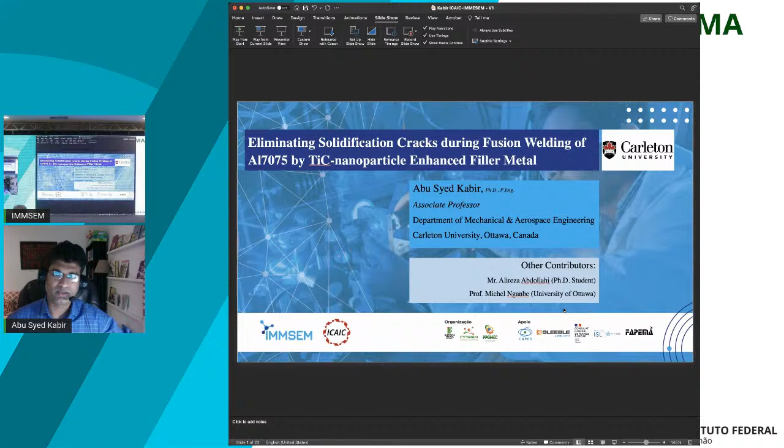And the topic for my presentation is eliminating solidification cracks during fusion welding of Aluminium 7075 alloy with titanium carbide nanoparticle enhanced filler metal.

Speaking of aluminum, it's about 8% of the Earth's crust is aluminum, making it the most abundant metal on the planet. However, it's always found combined with various other alloying elements, never by itself in pure state. Once we can get it in pure state, we can alloy it with different kinds of metals like zinc, copper, magnesium, manganese, and silicon, creating different alloys with different microstructures and properties.

I can continue, right?

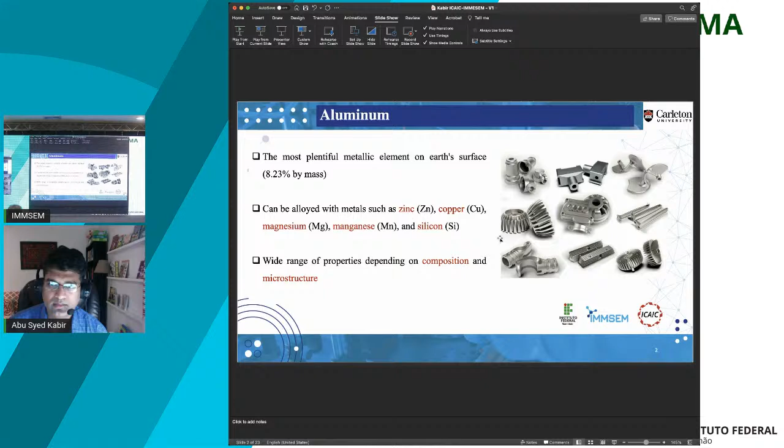Speaking a little about the history of aluminum alloys, the extraction of aluminum was so difficult during the early 19th century that it was more precious than gold. The story goes that Emperor Napoleon III reserved a prized set of aluminum cutlery for a special guest at banquets, and the less favored guests used gold knives and forks.

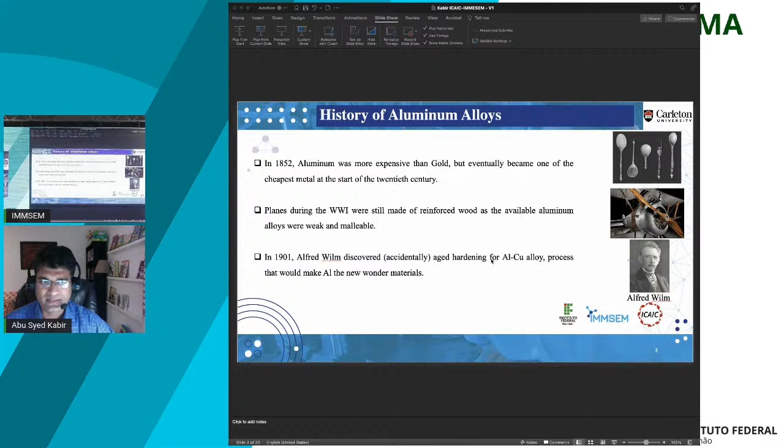The very first Wright brothers aircraft was mostly made of wood and bamboo frame, covered with canvas. The aircraft needed to be very light due to limited engine capacity, and there was simply no metal light enough at that time. At the same time, aluminum was available but prohibitively expensive, so most aircrafts before or during the World War I era were made of wood.

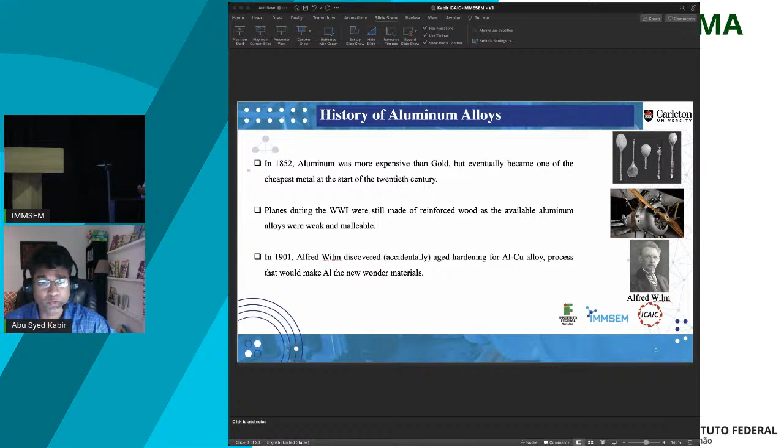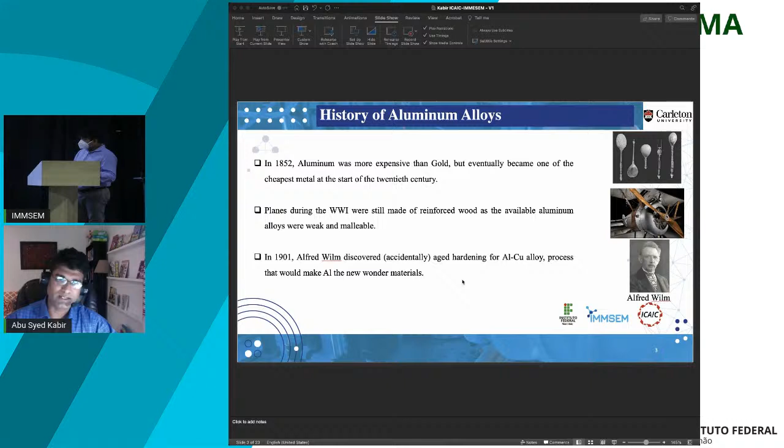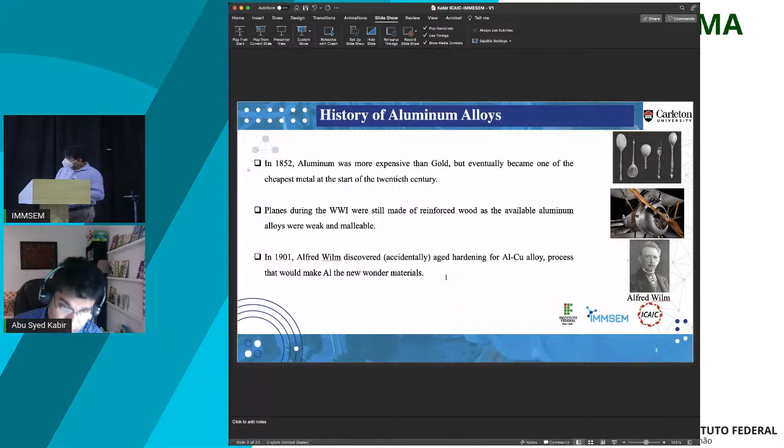Actually, during the time of World War I and World War II is when the use of aluminum became really versatile, especially in the aerospace industry. Another significant history in the aluminum industry is in the early 1900s when Alfred Wilm accidentally discovered the age hardening of aluminum 4% copper alloy. He actually created a new wonder material of the world by accident.

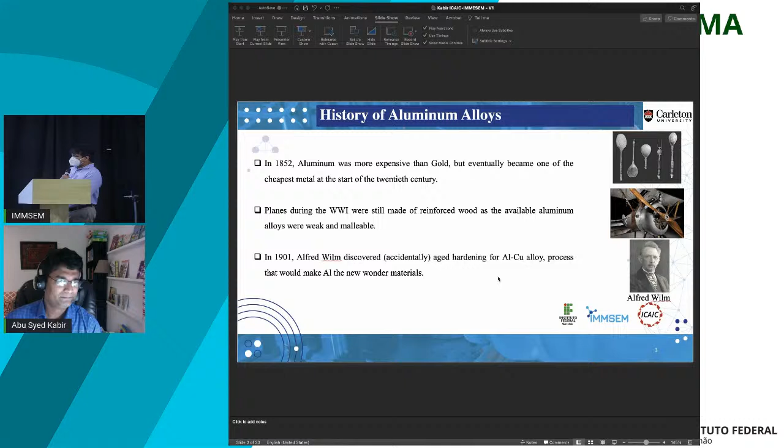Okay, you can go ahead with your presentation. At the end of the presentation, I'll be here for the question answer. Okay, you can go through in English. Okay, go ahead, that's very good.

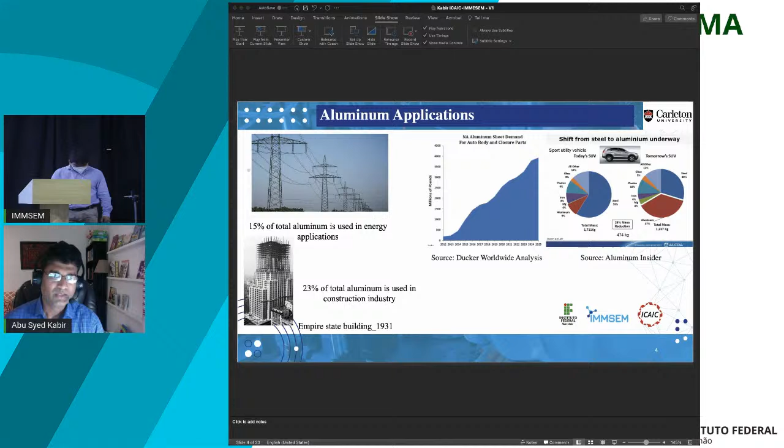Even though copper is a better conductor, all main overhead power lines use aluminum as the conducting material. To carry the same amount of current as a copper wire, the aluminum wire needs to be 1.5 times thicker, but is still 2 times lighter than copper. This decrease in load allows the spans between pylons to increase dramatically, saving a lot of money on construction of these overhead lines.

Speaking of construction, it is one of the highest users of aluminum alloys. Almost 23% of aluminum goes into the construction industry. The example here is the Empire State Building, built somewhere in 1930 and 1931, one of the earliest skyscrapers to use aluminum extensively because of its corrosion resistance and lightness. It was the perfect material for exterior framing and roofing.

Speaking about the automotive industry, automobile manufacturers are adopting aluminum alloys very fast. You can see the curve going straight up, and aluminum is replacing steel.

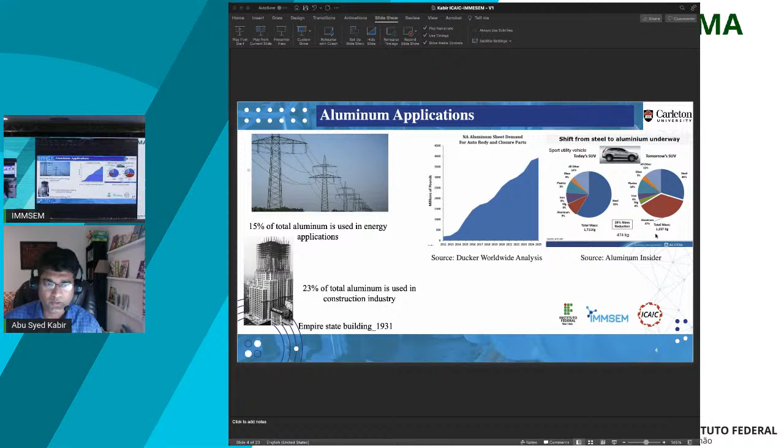There's an example published in Aluminum Insider that these days an SUV weighs about 1.7 tons, but within the next 3 or 4 years an SUV will weigh about 1.2 tons. That's almost 500 kilograms of weight savings. How are they going to do that? They're going to increase the amount of aluminum significantly.

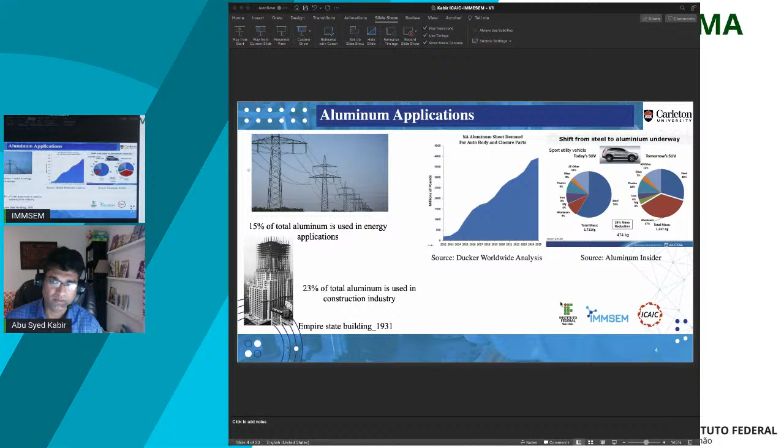Today's SUV has almost 60% steel, but they're going to use about 30% steel and replace it with 37% aluminum. There will be other materials too, like 4% magnesium, but aluminum is the one that will replace most of the weight, which is very important for the fuel efficiency of the car.

Now I have to talk about the history of aluminum in aerospace applications because that's my primary interest, as I'm from mechanical and aerospace engineering. A little history about aluminum in aerospace: the Wright brothers' aircraft, although made of wood and reinforced steel, had an engine made of aluminum alloy. The Wright brothers designed and manufactured this engine themselves.

At that time, in the early 1900s, the only engines available were automobile engines, but those were made of steel and were extremely heavy, not providing enough power to achieve takeoff. So the Wright brothers manufactured their engine from an aluminum-copper alloy. The story says they didn't want people to know the engine was made of aluminum alloy, so they coated the crankcase black so nobody knew what it was made of.

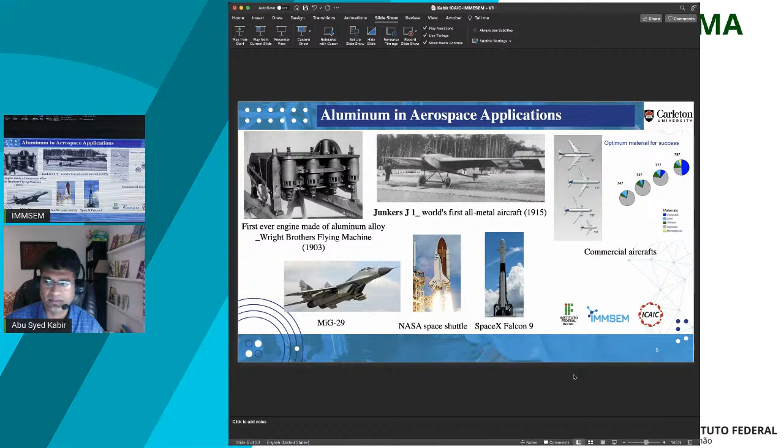Now talking about aluminum alloys, as I mentioned, different kinds of elements can be added with aluminum to create a wide range of chemical and mechanical properties. Based on that alloying addition, aluminum can be classified into 7 different classes.

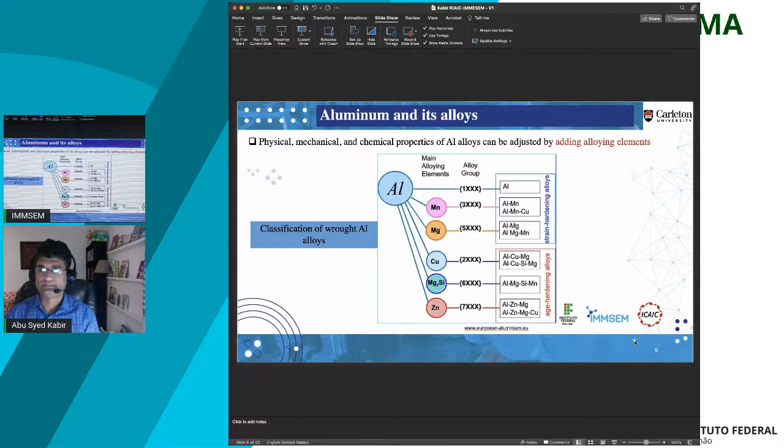We will target the 7000 series particularly because it is the strongest aluminum thus far it can create. So we will study the fusion welding of 7000 series alloy. A pesquisa está focada principalmente nessa classificação do alumínio com zinco, classificação 7000, que tem altíssima resistência. And the most popular 7000 series is Aluminium 7075.

E essa liga é alumínio 7075. The chemical composition shows that it has about 5 to 6% zinc, 2 to 3% magnesium, and about 1.2 to 2% copper. A composição química dele principalmente está focada entre 5.1 a 6.1, e tem outros elementos como magnésio, cobre, cromo, etc.

As we have a very high amount of alloying elements in the 7075, depending on the heating and cooling cycle, we get different kinds of intermetallic phases: beta phase, T phase, eta phase, theta phase, and S phase. All can form simultaneously, or some specifics can form at the same time, depending on the heating and cooling cycle. Como essa liga de alumínio tem muitos elementos químicos, ela acaba formando muitas fases intermetálicas, como a fase beta, teta, etc, e isso acaba influenciando em todo o processo da fabricação dessa liga.

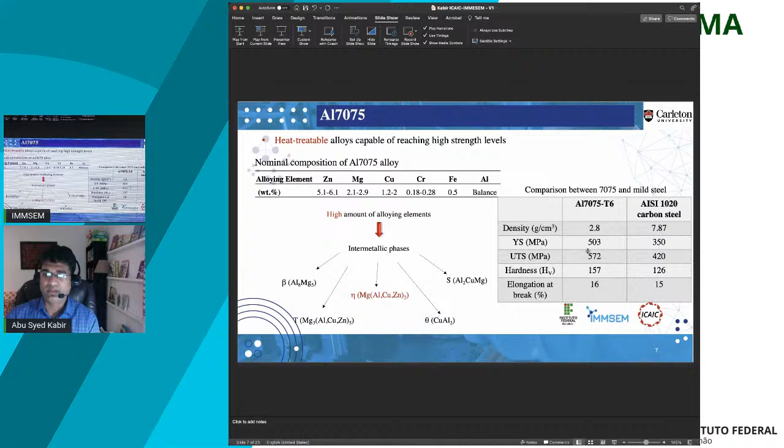Now, the reason why we are so interested about 7075: this is a simple comparison between 7075 at the peak hardness or T6 heat treatment and the AISI 1020 carbon steel, the mildest steel possible. We see that at the peak hardness position, we can get higher yield strength, higher UTS, higher hardness, and even better elongation than 1020 carbon steel. Whereas if you look at the density, it's about 1/3 of steel, which makes a big difference in transportation industry, especially aerospace and automobile industry.

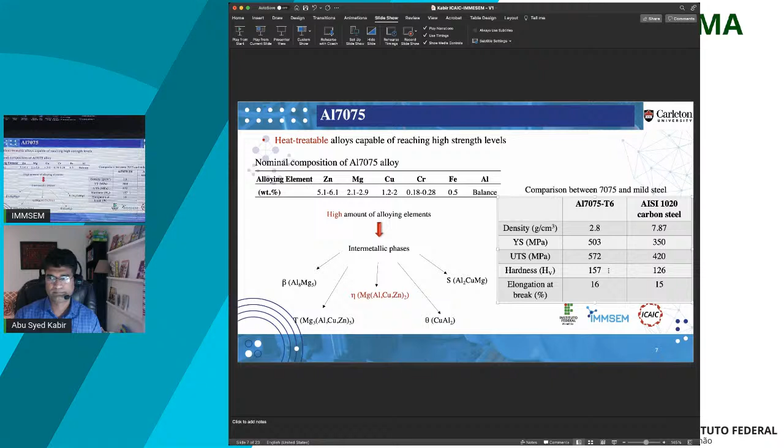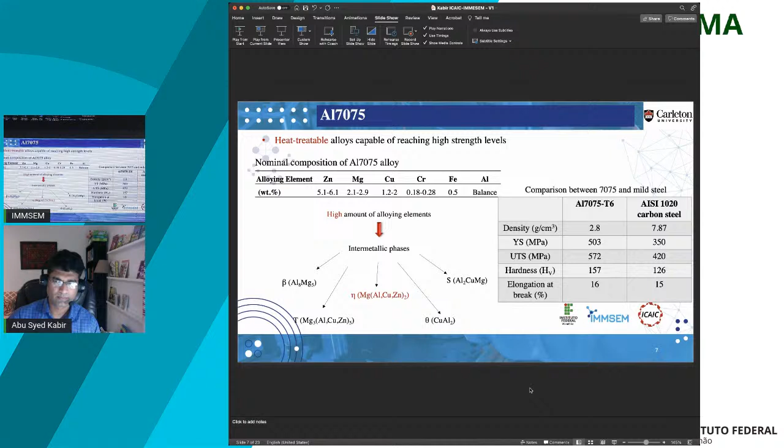Você consegue perceber dessa liga de alumínio, ela tem propriedades muito maiores que a liga de aço 1020, por exemplo. Ela tem limite de escoamento acima do aço 1020, limite de resistência acima, e o que é interessante, até a ductilidade é comparável com a liga do aço 1020. Mas o que é mais importante para a aplicação aeroespacial é que a densidade dela é muito baixa em relação à densidade do aço.

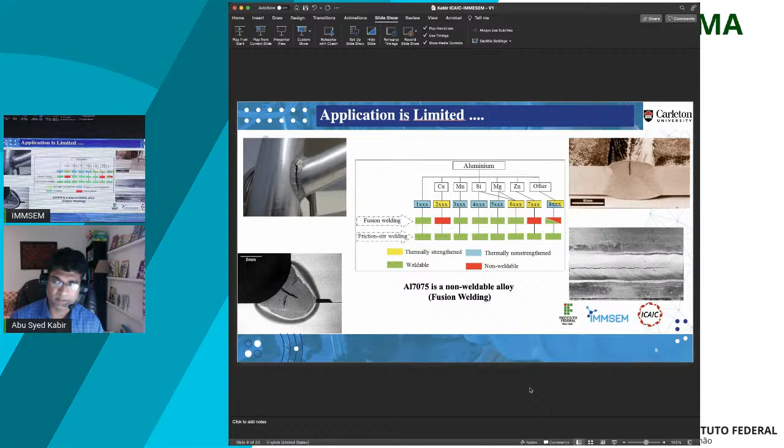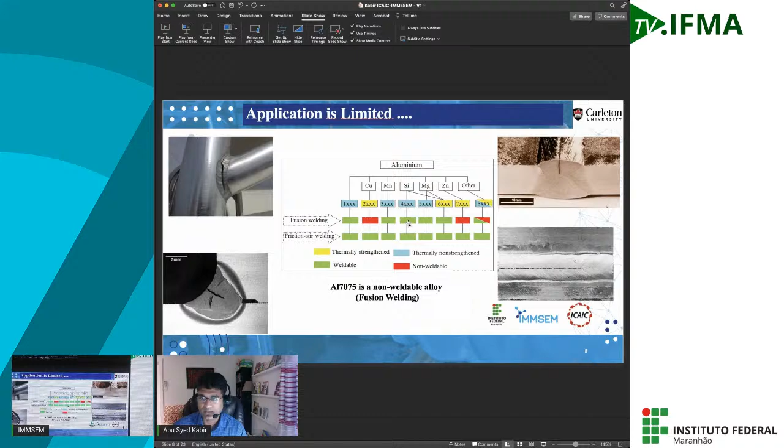Now, still, we know that 7075 has better strength than some of the mild steels, but still the application is limited because of the weldability, especially during fusion welding. So this plot shows which aluminum alloy is weldable and which one is not, and there is a big red block here on 7xxx, saying it's not weldable in fusion welding.

Com relação às suas aplicações, você percebe que apesar dessa liga de alumínio ter várias aplicações, ela tem muitas restrições. Uma das principais restrições é a questão da soldabilidade. Você percebe ali naquele gráfico de retângulos que essa liga está em vermelho, ou seja, ela não tem boa soldabilidade.

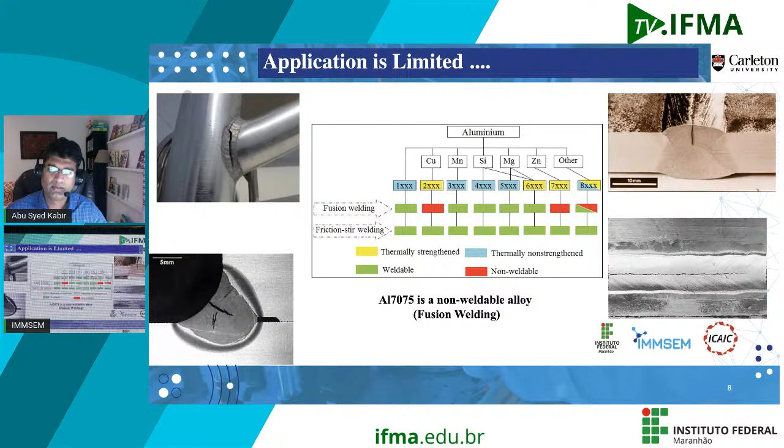A little about solidification cracking, why it forms: as I mentioned before, 7075 has a significantly high amount of alloying elements.

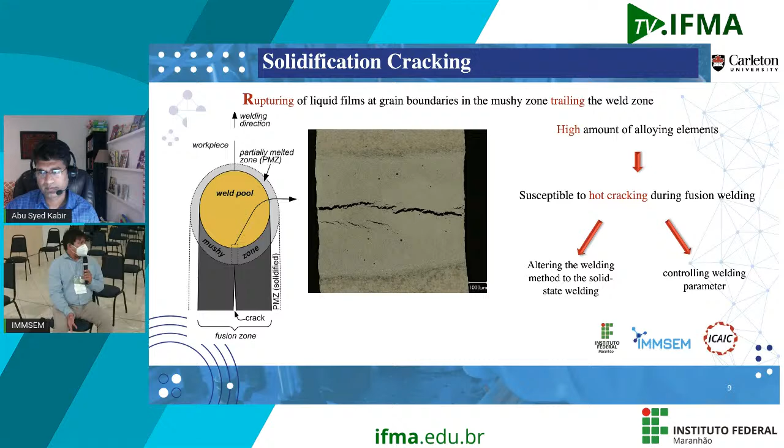Or we can control the welding parameters - optimizing them. If we control the fusion welding parameters, we are never going to get rid of the solidification cracks completely. It's impossible.

If we change it to a solid state welding process, the application becomes very limited, and it is very, very expensive, because the friction stir welding process is very expensive itself. The third way we can do that is by optimizing weld composition, which was not effective either.

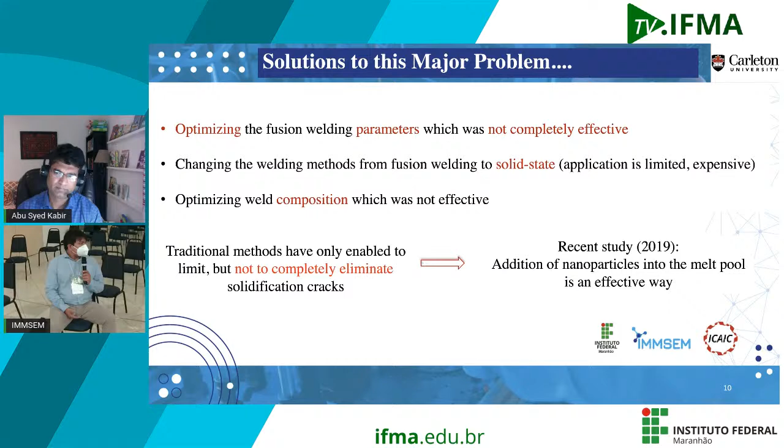Now, this is what they published. They welded 3 different aluminum 7075 sheet metals: one with conventional 7075 filler metal, so the base metal and filler metal are the same. They used aluminum 5 magnesium filler metal, which is a very conventional type filler metal generally used to weld 7075. And in the third way, they used aluminum 7075 filler metal, but that filler metal was incorporated with 2.4 weight % titanium carbide nanoparticle.

Você percebe, nós temos aqui as três figuras que mostram. A primeira mostra o processo de solda normal que se aplica. E aí, no caso, nós percebemos também na figura C que o cordão, o metal de adição, vem incorporado com 2,4% de nanopartículas de tamanho de 40 a 60 nanômetros de carboneto de titânio na liga de alumínio 7075.

And the image shows the output of the welding process. You see a big solidification crack right in the middle of the first image when they use 7075 filler metal. There's a big solidification crack when you use the aluminum 5% magnesium.

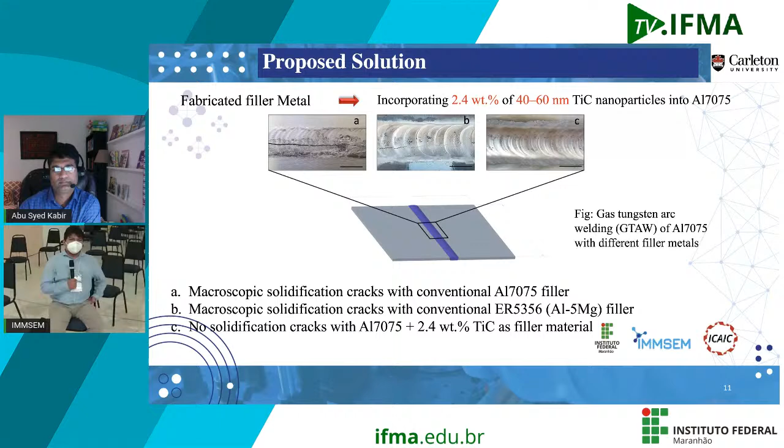Vocês veem, então, quando ele usou o filamento, o metal de adição, com esse percentual de 2,4% de carboneto de titânio, essas nanopartículas eliminaram totalmente a trinca de fusão quando comparado com as figuras A e B. Ou seja, C eliminou totalmente essas trincas de fusão.

So what was the proposed solution? What did really happen when you add titanium carbide nanoparticle in there? According to that paper, the grain morphology changes in the fusion zone, from columnar to equiaxed grain. And at the same time, there is some kind of modification in secondary phases as well.

Ou seja, uma das observações que foram feitas no artigo é que esse novo material mudou a morfologia granulométrica da zona de fusão e também mudou as fases secundárias, modificou as fases.

So the paper doesn't really explain that. Well, it's a legendary paper because it's the first time somebody said that they can eliminate solidification crack. I believe that's the reason it was published in Nature Communications, and it definitely was worthy to be published. But the paper doesn't really explain how the mechanism works in the proposed solution.

Ou seja, tem essas soluções propostas, mas como sabe, é um artigo, né? Ele não diz por que aconteceu essa eliminação de trincas. Então, é um artigo publicado, porém não diz lá os detalhes.

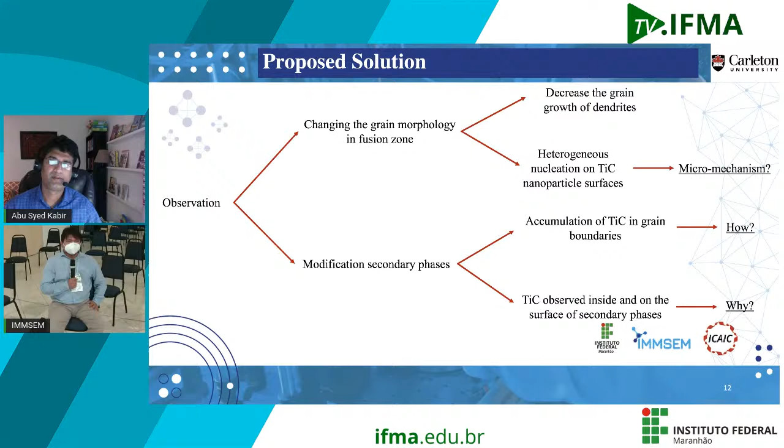So we did experiments almost the same. We had a 3 millimeter thick 7075 T6 sheet, and we bought the filler metal from the same company, enhanced with 1.78% titanium carbide nanoparticles. We did butt welding with tungsten inert gas welding, using some welding parameters, but this is the main one: heat input, which was almost 0.7 kilojoule per millimeter, considered to be very high heat input.

Okay, I'll come back to this one. Then we did some microstructural characterization with optical and scanning electron microscope. We did phase identification with XRD, and we did tensile testing and micro indentation hardness testing.

Então a gente decidiu fazer todos os experimentos, usar experiência similar à que foi publicada no paper.

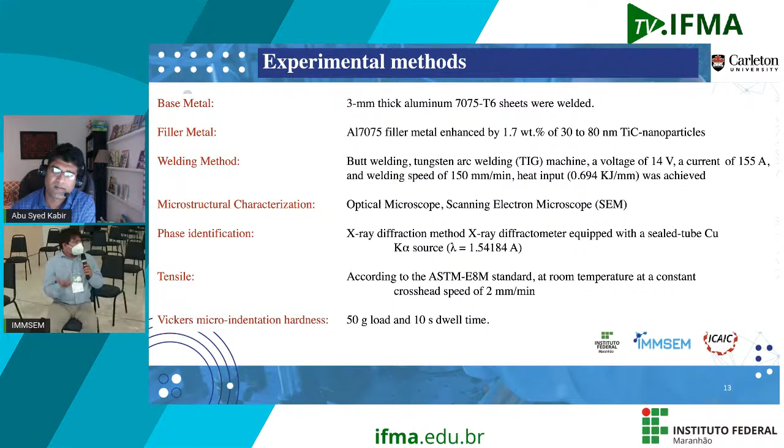So this is the output. We created two different welds: one autogenous, another heterogeneous. The autogenous weld used no filler metal whatsoever, we just joined two 7075 sheets without any filler metal. In the heterogeneous joint, we welded the sheets with filler metal, a 1.7 weight% titanium carbide nanoparticle infused 7075 filler metal. So we have nanoparticles in the heterogeneous joint, and none in the autogenous joint.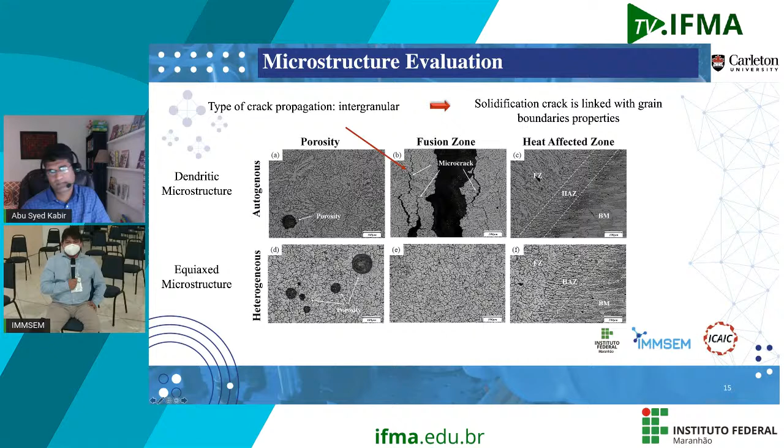If we look at the scanning electron microscope images for the fusion zone in autogenous and heterogeneous joints, the basic difference between those two fusion zone structures is these long and continuous phases present in autogenous welds. We don't really see that kind of long and continuous phase in heterogeneous welds, which means we have titanium carbide nanoparticle in there. It is understandable, kind of guessed, that somehow the titanium carbide nanoparticle prevented the formation of that long and continuous phase precipitates, which are harmful precipitates for the structure.

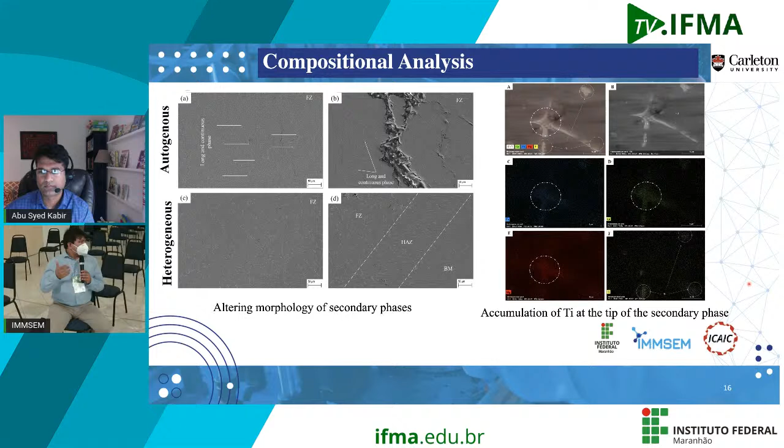Now we performed some mechanical property tests as well. First of all, we couldn't test the autogenous welds because of the large solidification cracks, but we tested the heterogeneous welds, and found the mechanical properties are in some cases good, in some cases not that bad, not that good, and they all failed in the fusion zone. But the 7075 base material is stronger: it has an ultimate tensile strength of 572 megapascal, while what we got maximum is approximately 400 megapascal.

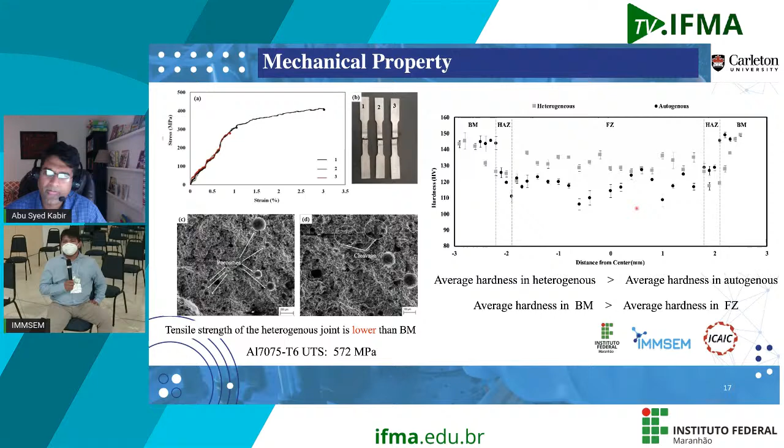Okay, so this is the hypothesis that we have: the presence of titanium carbide nanoparticles actually changes the precipitation morphology. We found trace amounts of a very new type of composition that has titanium in it. So we are guessing this new composition of precipitates actually does not lead to the formation of continuous precipitates in the structure.

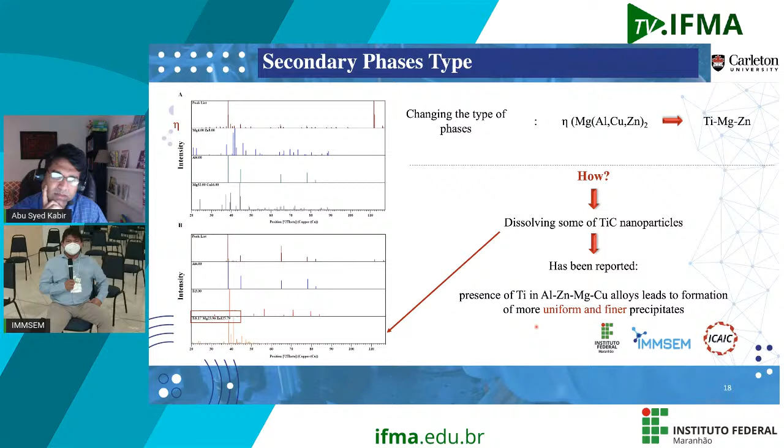Okay, so let's come to the conclusion. We found that the titanium carbide nanoparticles in the fusion zone were effective in eliminating solidification cracks, and we proposed 2 mechanisms for this. One mechanism is that the presence of titanium carbide changes the grain morphology from dendrite to equiaxed, and it changes the morphology of the secondary phase as well.